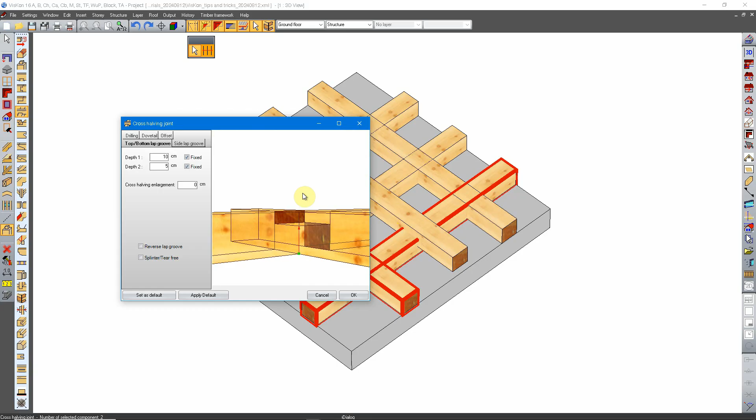For example, if I want to set this to 10 centimeters, the other goes to 5, because I have 15 centimeter height elements here. And this looks like it. If I get these ticks out, it goes back to symmetrical halving.

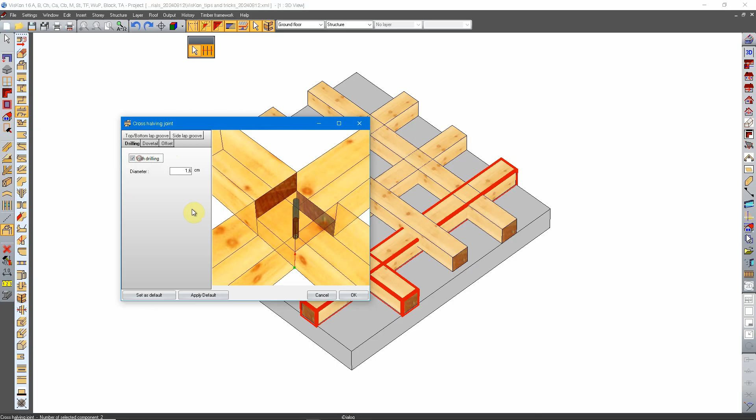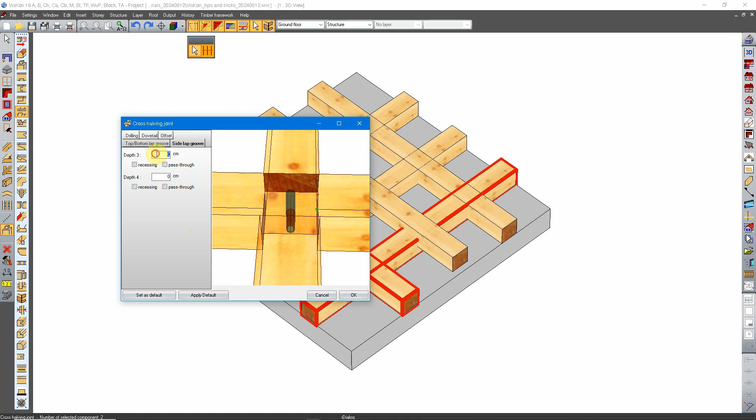You can set drilling, and of course you can set the diameter of it. You can make an offset, maybe dovetail, side lap groove. You can set a third depth, apparently.

Let's go back, and clicking OK, you can see the drilling. You can see that one of the elements is bisected, is cut in two pieces.

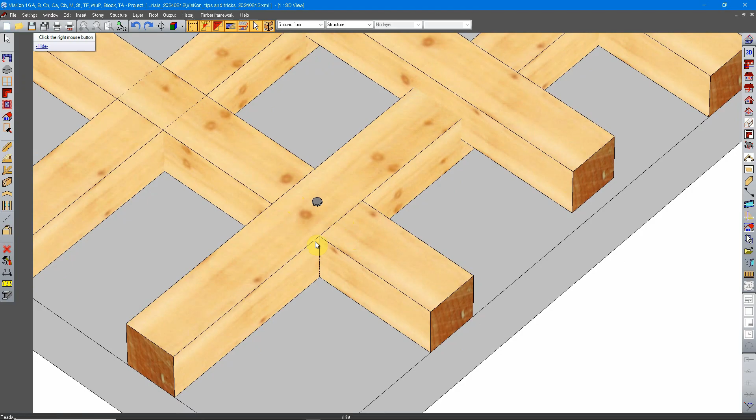But if you set the wireframe model with textures display mode, you can see that actually these are indeed half lapped.

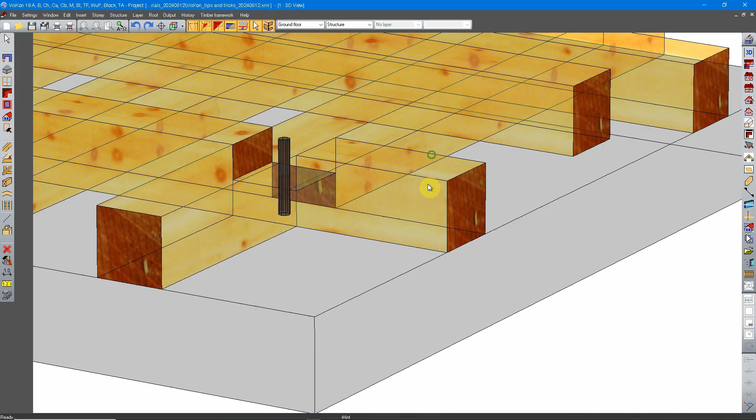Actually, it doesn't matter if the two elements of yours are making full contact or just barely touching, because you can still make a half joint just like this.

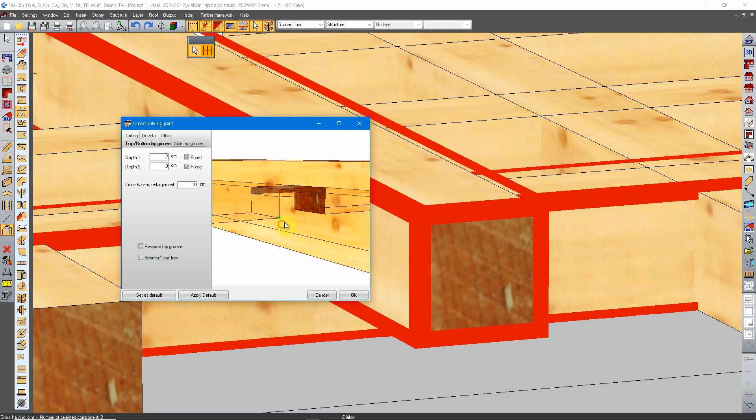As you can see, you can still set the depth of these elements, maybe this back to 2, this comes up to 8, something like it. And now you have a quarter half lap joint, if I can say so.

Clicking OK, we can still check if it's there. Yes, it is.

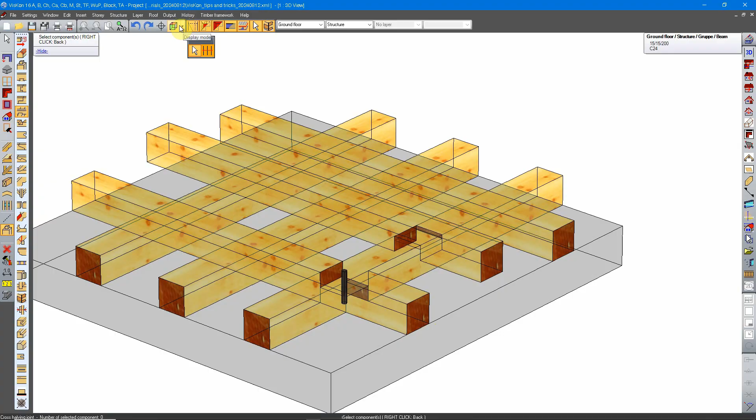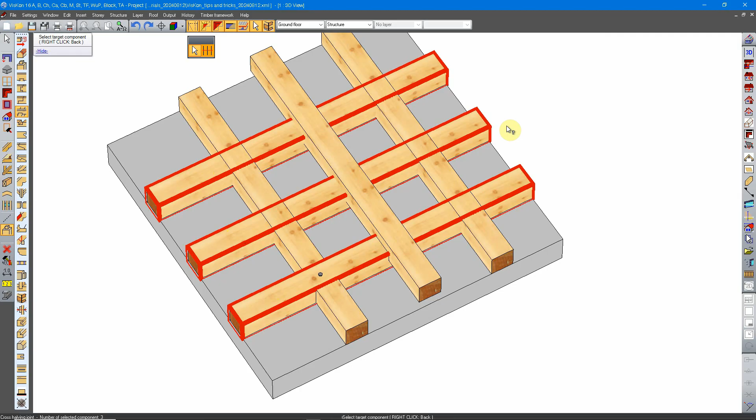Now if you want to set these connections, all these 9 connections at the same time, you can do that as well by selecting our command, pressing Shift, selecting all the elements in one direction, pressing Shift again, and selecting all the elements in the other direction.

Shift again, and now it automatically brings up this window. And as you can see in the preview, all the connections have been made.

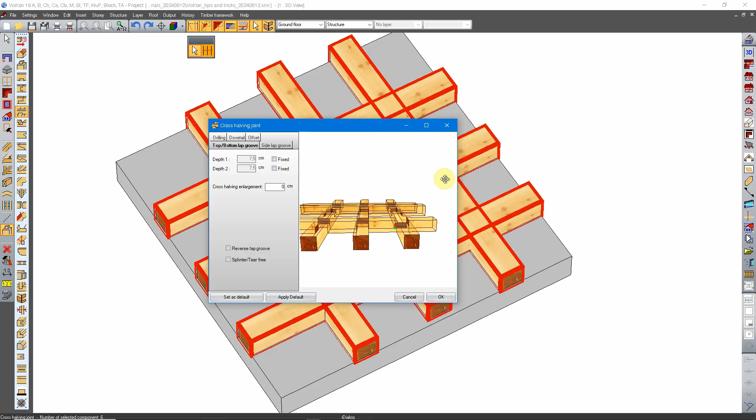And of course, all the connections you can change or modify at once.

Okay, and going back to wireframe, you can see all those sweet connections you made with just barely a few quick clicks.

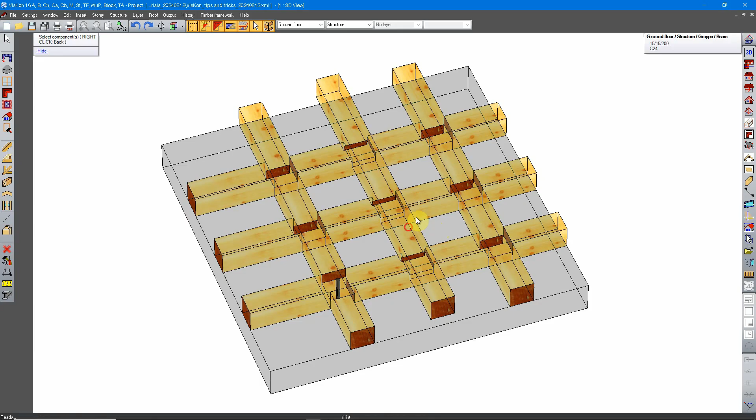So this is it in general, how to use the halving joint, cross halving joint in VisKon 16.